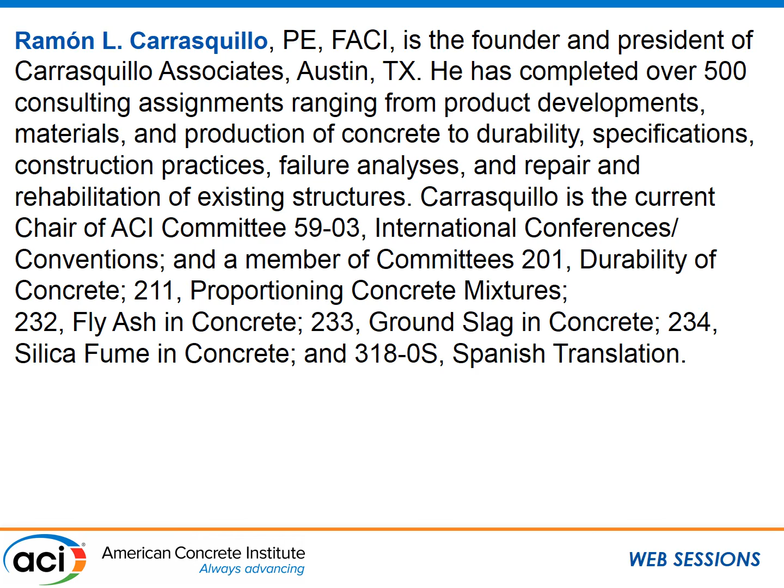First of all, I'd like to thank you for being here. Hopefully you're not going to be disappointed by the other guy's talk - mine may be, so hang around for everything. But what I'd like to do is talk a little bit about what the owner can expect to get from a 100-year service life specification.

Nowadays everybody wants a 100-year service life, and it reminds me of when I used to have a ready-mix concrete company. We cast a slab and it had a huge crack down the middle, and the architect was upset and asked, can you guarantee me that crack? I said, yeah, I guarantee we'll be there for the rest of your life. Anyway, it's the kind of thing where you can almost say anything, and you don't know exactly what you're saying.

But before we go much further, I'd like to ask you - do you know how fast the world is changing? That's something we don't tend to realize nowadays.

Let's talk about what it takes to have a service life. Basically, a service life is the result of the work of all parties involved. In other words, everybody has to be aligned and everybody has to do it correctly for you to get the service life you thought you were going to get. Unless everybody is lined up and contributing, it is not going to happen - and that's when things start becoming a problem.

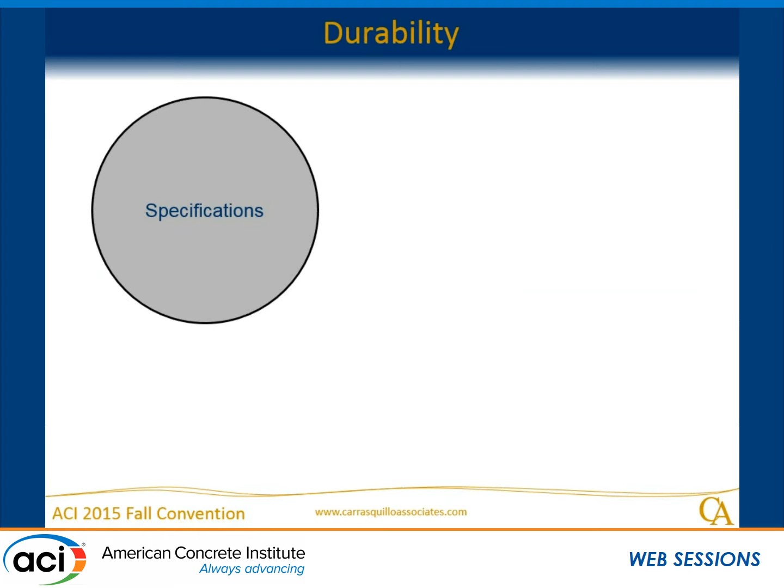Let's take durability as a simple example. Going into durability, you're going to have specifications, design, and construction. The question is: can the construction give you durability? Can the design give you durability? Can the specifications give you durability? None of them can give you durability by themselves. What happens is that where the three of them cross is where you're going to have durability - a small portion of all the efforts of everybody else.

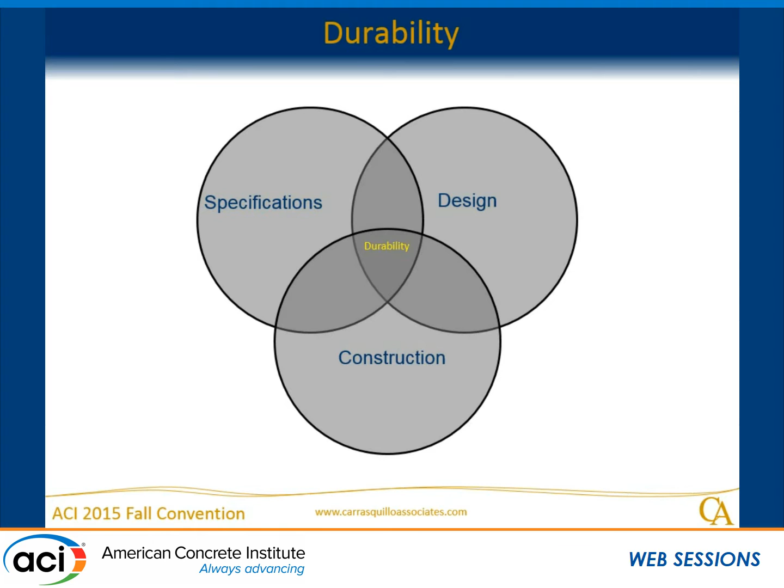So when you think about durability and service life, you have to start thinking that in my 100% world, there's only going to be about 20% of it that I'm going to share with other people, and that's where durability is going to be. That's where we're really going to work together and accomplish something.

My question to you is: durability, service life - if I have something that is durable, does that mean I have a long service life? Not necessarily. We focus on durability, we focus on making this durable, but that doesn't mean I'm going to have service life. So we have to understand the difference between service life and durability.

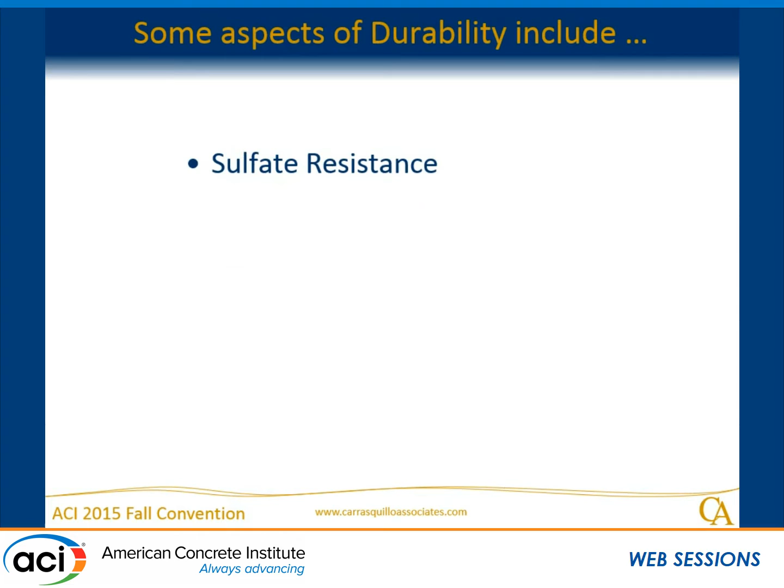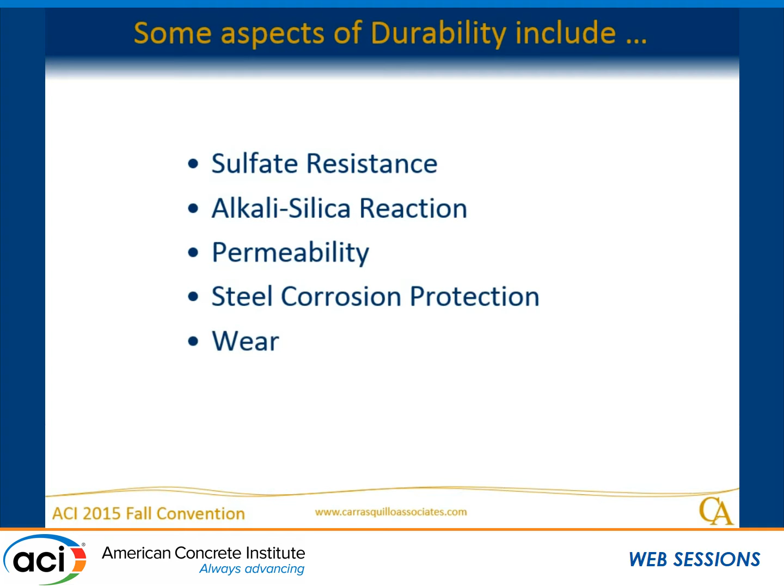Let's think of some aspects of durability: sulfate resistance, alkali-silica reaction, permeability, steel corrosion protection. Those are just a few aspects of durability. Now let's think about what are a few things that affect these.

On one side we have the cementitious material chemistry - Portland cement, pozzolans. If you go to different countries, you may have cements where, under standards like 1157, if it gets hard it's called cement. In some places you have 10% addition, some 30%, some 35%. So the world is getting very complicated.

Then you have the mix proportions - the water-cementitious material ratio, the cementitious content. You have the aggregates and aggregate characteristics. You have permeability, which is affected by pozzolans, by water-cementitious ratio, by consolidation. And then you have construction, which includes consolidation, curing, cracking, finishing, and jointing. So let's look at one of these - let's look at sulfate resistance.

Well, the sulfate resistance is affected by the cementitious chemistry, the proportions, the permeability, and the construction. And in ACI, we try to come up with one or two numbers, right? That'll give me durability.

Then let's look at the alkali-silica reaction. We have chemistry of the cement, we have proportions, we have aggregate characteristics, we have construction. Let's look at permeability. It's affected by the chemistry of the cementitious material, by the proportions, by the construction, the curing.

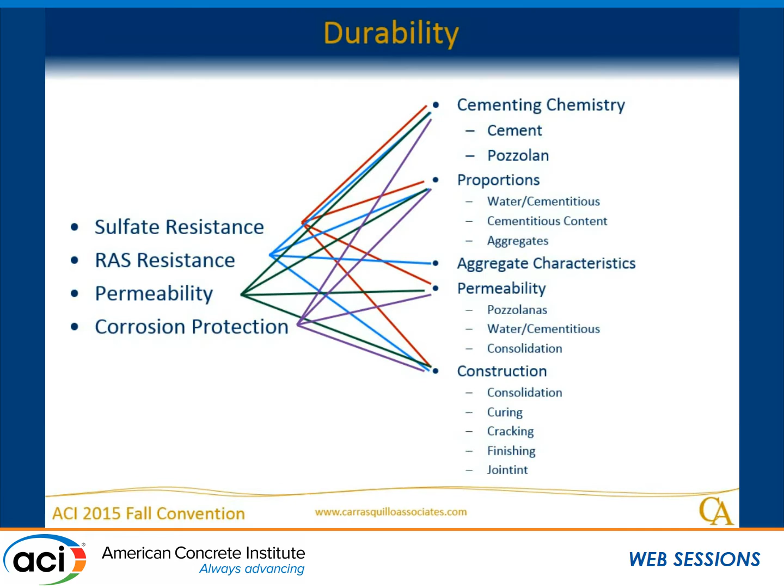Let's look at corrosion protection. It's affected by the chemistry, by the proportions, by the permeability, by the construction. So it's a mess. So anybody that thinks that durability is something very simple, it is not. It's something that really takes the effort of all the parties to make it work, and you have to really get concentrated on how all these materials even start working one with each other. And that even affects it further. So we're talking something that is very complicated.

But 100-year service life means what? It costs a lot, we'll get into that. Does it mean that the structure has to have a service life of 100 years? Or does it mean that a member, the beams, have to have a 100-year service life? Or does it mean that the materials have to have a 100-year service life? Does it mean that the concrete is durable, but I don't take care of the structure for it to give me the service life? I mean, what does it really mean? It's something extremely complicated.

So, for example, service life means that the structure, the members, the material can still perform 100 years from now what they do today. And I don't think I can blow the candle when I turn 95, you know what I'm saying? What does it mean? What does service life mean? Does it mean that 100 years from today I can still do what I'm doing today? Because that's a very sorry picture, don't you think?

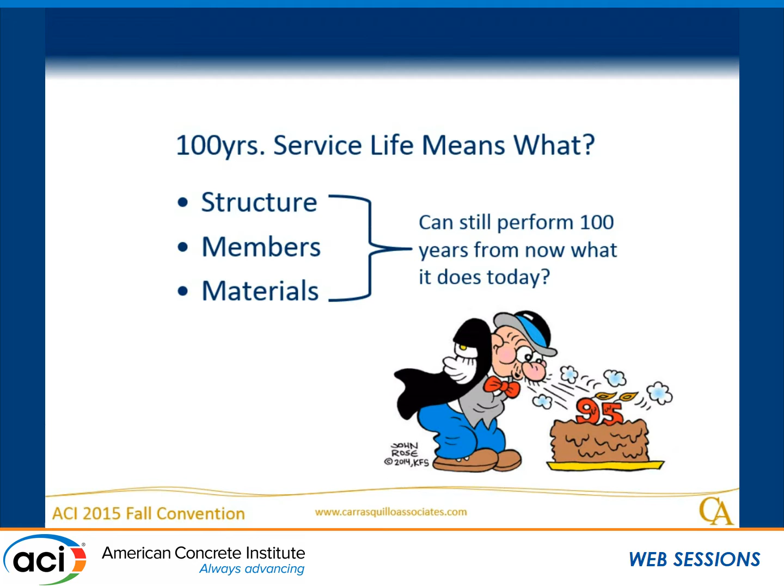If I'm designing something today and I give you 100-year service life to do the same thing, I can think of structures where that may be true - the Panama Canal, big dams and all that. But that's only a handful of structure types that we can expect to do the same thing. What are we talking about when we specify 100-year service life? By the way, I'll guarantee anything over 10 years - I'm not planning on being around, I'll be retired, but they'll have to look for me somewhere else, you know what I mean? But anyway, what are we talking about when we specify 100-year service life?

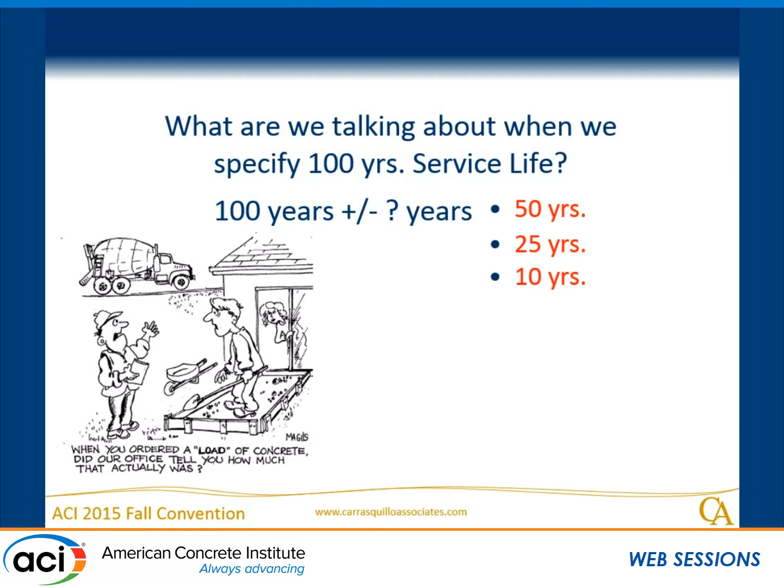Are we talking 100 years plus or minus what? You know, as the saying goes, when you ordered a load of concrete, did your office tell you how much that actually was? Are we talking plus or minus 50 years? Are we talking plus or minus 25? Are we talking plus or minus 10? Because I don't know any of those. Let's just be realistic - I mean, what do we mean by that?

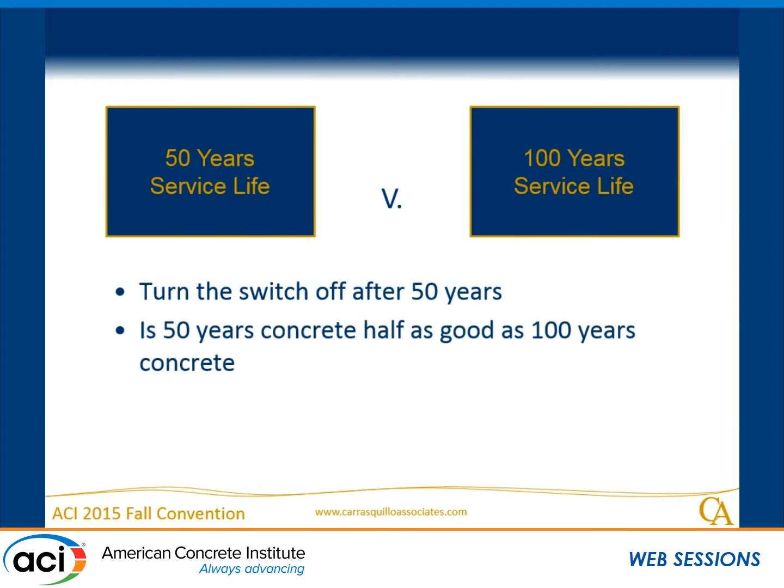So, for example, let me ask you a question here. You have a 50-year service life, and I have a 100-year service life, right? My question to you is, can I turn off the switch after 50 years? I mean, I'm going to give you a structure that lasts 50 but doesn't last 75 - how do I do that? Is 50-year concrete half as good as 100-year concrete? It should be, right? Because if we say there's a difference between 50-year service life and 100, there must be a difference between those two.

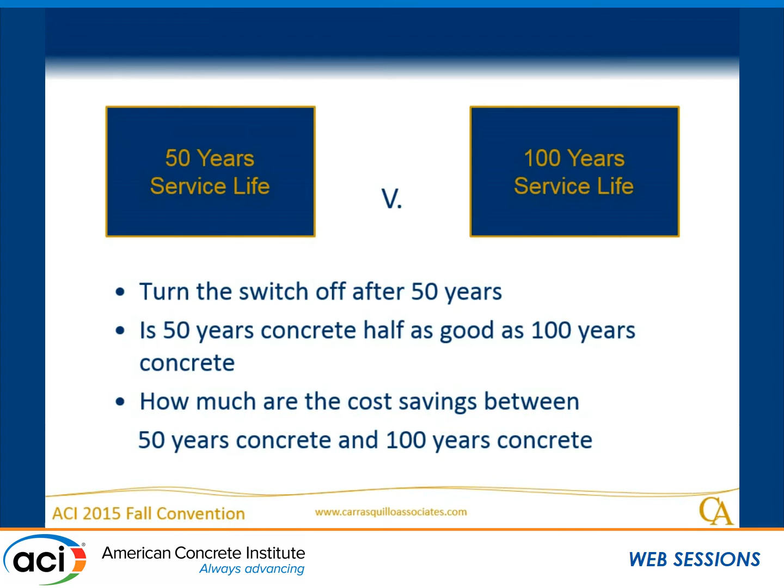I was hired one time by people in another country because they were going to do the highway system, and they wanted me to develop the specification for 100-year concrete. And I go there to the highway guy and I said, but can you tell me what the exposure conditions are? They say, any. I mean, what's that, any?

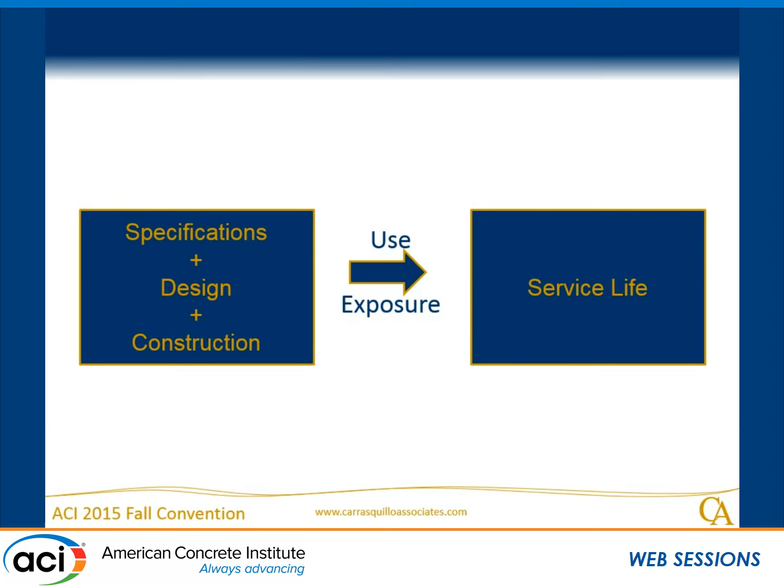People don't like to take responsibility over things. And then add the role of maintenance in ensuring the service life of a structure. A 100-year service life doesn't mean that you're not going to give it maintenance. And if you don't give it maintenance, you're stuck.

So a 100-year service life means that a few bars are not going to corrode here and there, that I'm going to do a little bit of patching, or that I'm going to get cracks and I'm not going to have to seal a few cracks. Is that what 100-year service life means?

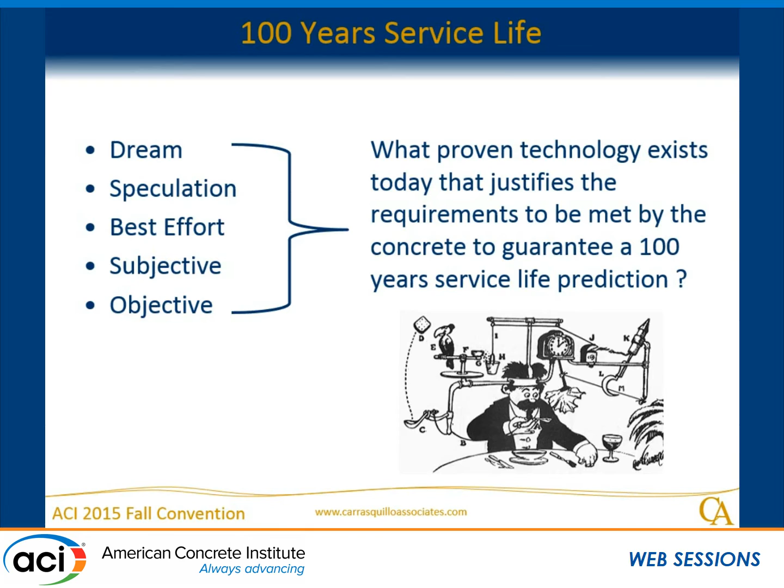So let me give you an example that happens in front of all of us. It happens in front of all of us, and we do it every day, and we blow the requirements of durability, and we sign off on it. Let's get an example. Let's talk about performance specs.

So for a performance spec, somebody has to determine what is needed, right? Somebody has to say, well, this structure needs this. And then they have to say, if I need that, then they have to determine what I have to specify based on what I think I need.

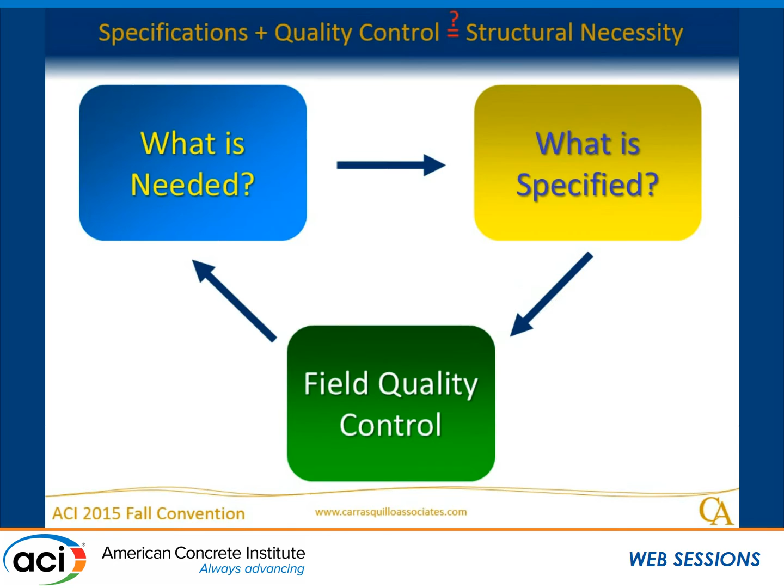Then I'm going to have a field quality control program, because when I build it, I have to do quality control so that whenever construction goes, I'm getting what I need - true or false, I need that, right? That's a basic concept. Let's say that we need strength and durability.

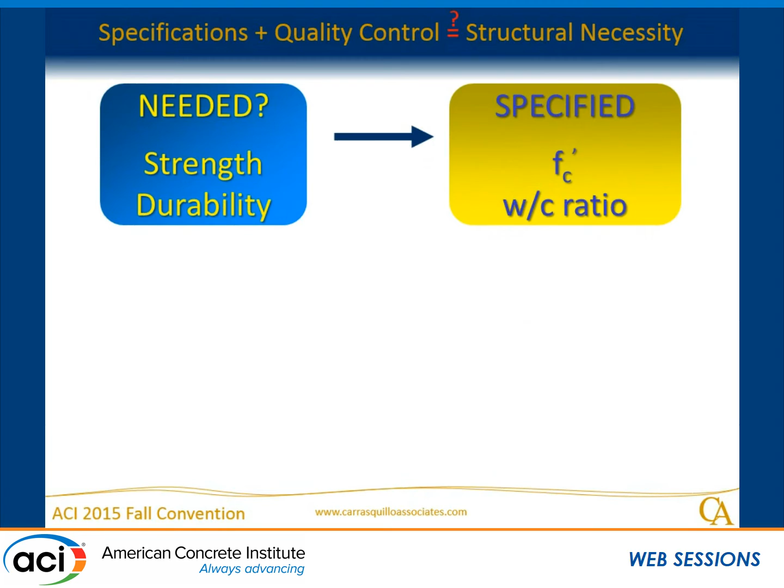And let's talk about typical specs. Let's say that we need strength and durability, so we specify a concrete strength and a water cement ratio, right? That's typical. And then I have a quality control program where I'm going to do strength - cylinder strength, I'm doing slump and air and all that kind of stuff.

But let's say all of those things meet, and I specify my quality control, I'm going to check strength, because you're the structural engineer, and they're going to send you the breaks. And when they send you the breaks, what are you going to do? If I'm asking for 5,000 and I get 5,001, it's okay. That's all you're going to do as a structural engineer.

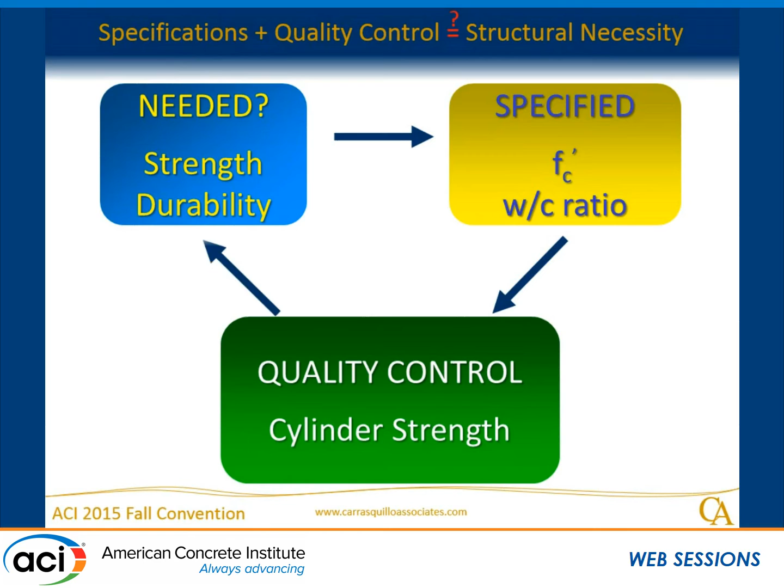And you're the one that determined what was needed, you wrote the specs, and now they're going to send you the results, and you're going to say, yeah, that's what I need. So the thing is good.

Let's get an example. I need strength and durability, so I specify 3,000 PSI and a water cement ratio of 0.45, because I have all of the ACI committee reports and all that, and I know that I need a 0.45 water cement ratio. So I come in.

Now what happens is the contractor gets a submittal from the ready-mix company, and then they send me the results, right? So because the specs call for a water cement ratio of 0.45 and the specs need 3,000, what will happen is that the submittal at a water cement ratio of 0.45 is going to break on average much above 3,000, maybe 5,800. That's the nature of the beast.

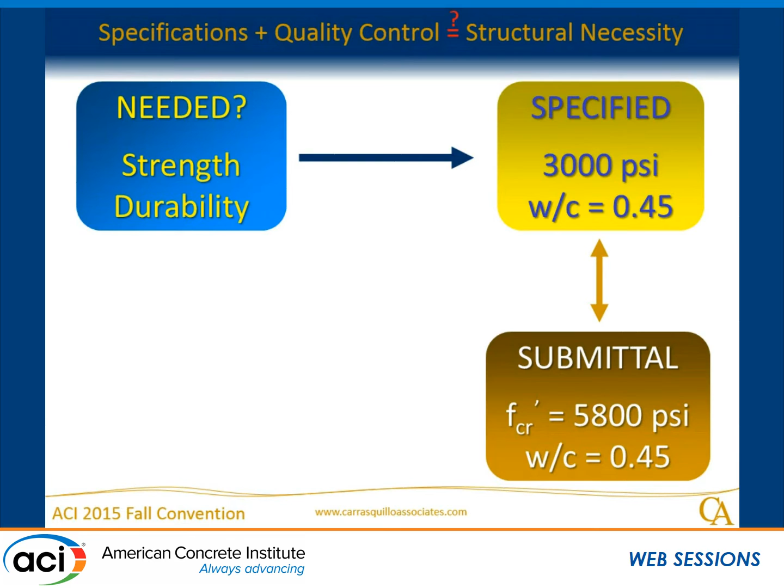That's always going to happen. Whenever we go with this 0.45 water cement ratio, the strengths are going to be way above what structurally we need, right? I get a submittal, and you're the structural engineer, and they send you the submittal, and you don't know anything about what's in it when it comes in, and you don't even know what the admixtures are, but all you know is that somebody said water cement ratio 0.45, and hey, in school they taught me, my mother taught me, that 5,800 was more than 3,000, so that's okay.

Anybody, including my mother, knows that 3,300 is more than 3,000. But my question to you is this: does that concrete have a water cement ratio of 0.45, which is what I needed for durability? No. And we do it every day. Then afterwards we wonder why the concrete is corroding and the rebars are corroding, and we're getting all sorts of problems in the structure because of the engineer. That's why you have to sue the engineer. When this happens, we bring the engineer in and you feel sorry for him because he doesn't even know what's going on. But he signed off on everything. So his insurance is there, but he blew it. He's the one that wrote the spec.

He's the one that approved the submittal, and he's the one that approved the cylinder breaks. So now when I take a core and send them to David Rossi, he says, man, this has more water than Niagara Falls. Yeah, but it broke at 3,300, which is more than 3,000. And in all of that, the guy's guaranteeing a 100-year service life.

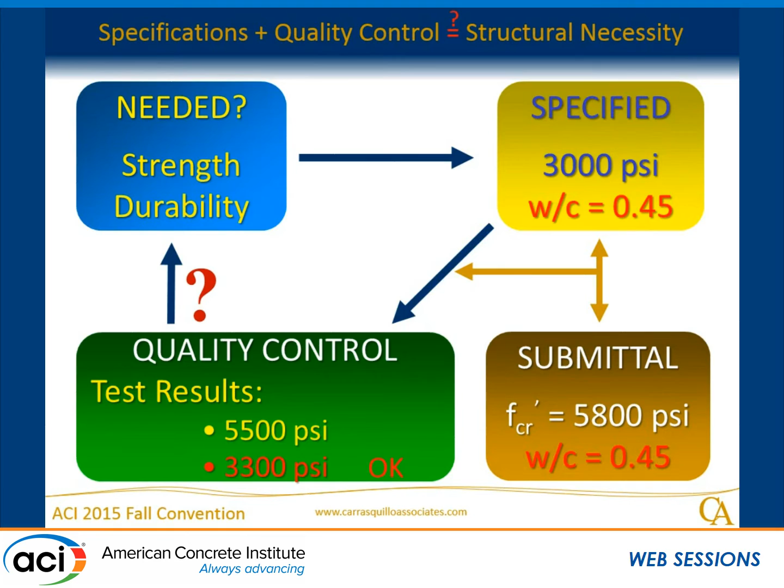We have to understand what's going on. We have to understand the world we're living in. So service life requires thinking outside of the box. And thinking outside of the box, we think of a job like this. This is a little bridge in Puerto Rico at a rice grain terminal. Hey, the corroded rebars are at least holding the little dinghy there.

But after, in Puerto Rico, we put everything to use. But I'll tell you one thing, what's the problem there? Yeah, that's right, you could have a lot of problems, right? That's why when you go to a job, the first thing you do is what? Say nothing. I mean, unless you can improve on silence, keep your mouth shut. You know what I'm saying? That's the number one rule.

But somebody would say, oh, the steel is corroding. Let me tell you one thing: the steel is supposed to corrode when the chloride ions get to it. Period. So the steel is doing what it's supposed to do. The question is, why is it that the chloride ions are getting to the steel? Is it the permeability of the concrete? Is it the cover of the concrete? Is it the sulfate resistance of the concrete that is causing degradation of the concrete cover, and therefore now the chlorides get there even though you have the right permeability?

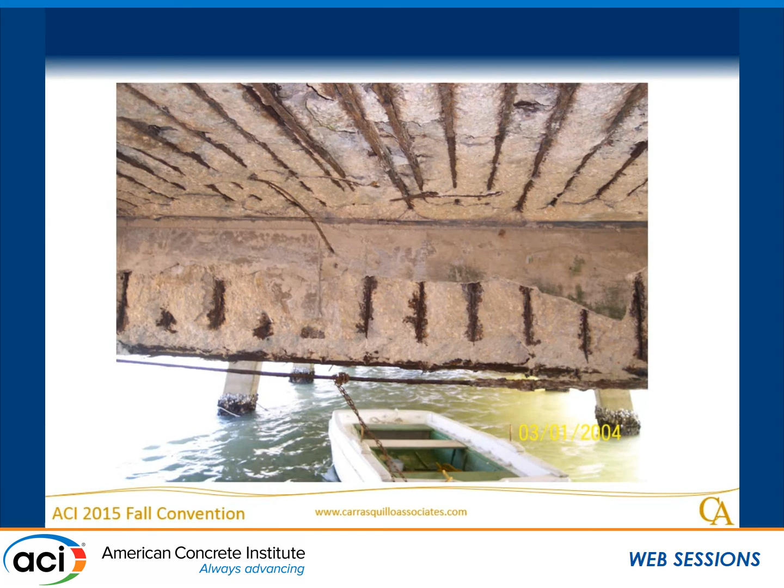You have many, many different things that could go wrong, so you have to think of all the possible aspects. And what's a big problem? The big problem is in construction, we use bad concrete to satisfy the specs. Have you ever seen that? You have a spec, and all of these concretes, this one, this one, this one, they all have the same water cement ratio, and they all have the same slump.

So they all meet the specs. However, it's not the same thing to date this guy as to date this guy or to date this guy, you know what I'm saying? But they all meet the specs. How can that be? What is the engineer's responsibility in constructability since they wrote the specs? We're forgetting that. And you know what happens in the industry, and this happens every day.

A contractor never has enough time to wait for the concrete to have, let's say, a low permeability. Because somebody comes back and says, I want the specs to have a C1202 resistance to chloride penetration of 1,500 coulombs at 28 days. And they say, but why at 28 days? Well, because the contractor cannot wait 6 months to find out if it meets 1,500 or not. So he says, I have to test it at 28 days. So for you to have concrete that passes that spec at 28 days, what do you have to do? Use bad concrete. You're going to use this guy, because this guy has silica fume and all that kind of stuff, so you use that guy so it passes the test at 28 days of C1202.

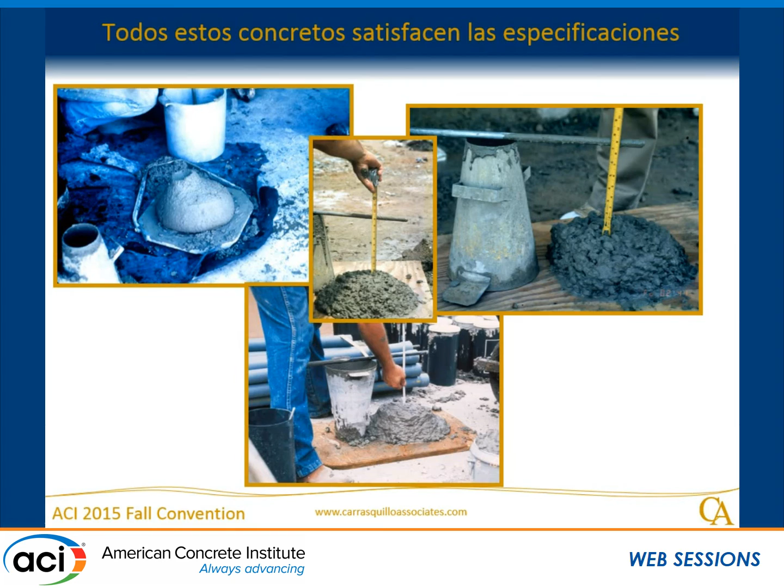So what happened was they said, how can we avoid that? And the first question you have to decide is: when is it important to determine at what age after placement the concrete must show that it meets the requirements in the specifications to ensure its durability and service life?

My question to you is, if you're building a bridge deck or a pier, do you need that permeability in the first 28 days? No, you need it in a year. I don't care if the chloride penetrates a quarter of an inch or an eighth of an inch, not even that much. But am I going to have a concrete that cracks just so I can meet it at 28 days?

So we said, hey guys, let's do the following. We're going to bring a ready-mix truck here. I had a few students, and I said each one of you is going to come up with any concoction you want between 0 and 28 days of accelerated curing, slow curing, whatever you want, for 28 days, and then we'll test the permeability at 28 days.

But in the meantime, we're going to have concrete cylinders that we put in water and keep them there for a year. And at the end of the year, we're going to find out who wins.

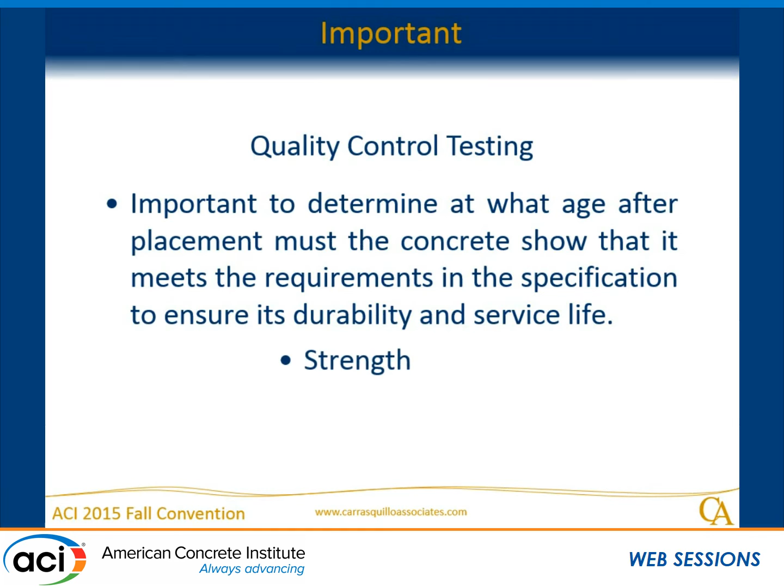And we did it with many different kinds of mixes: high cement content, low cement content, high stone, and all that. So the big question is, okay, I need strength, I need permeability. When do I put it in service?

So you have to always remember that not everything is correct. Like, you know, even Noah's Ark had a problem. The woodpecker had to go.

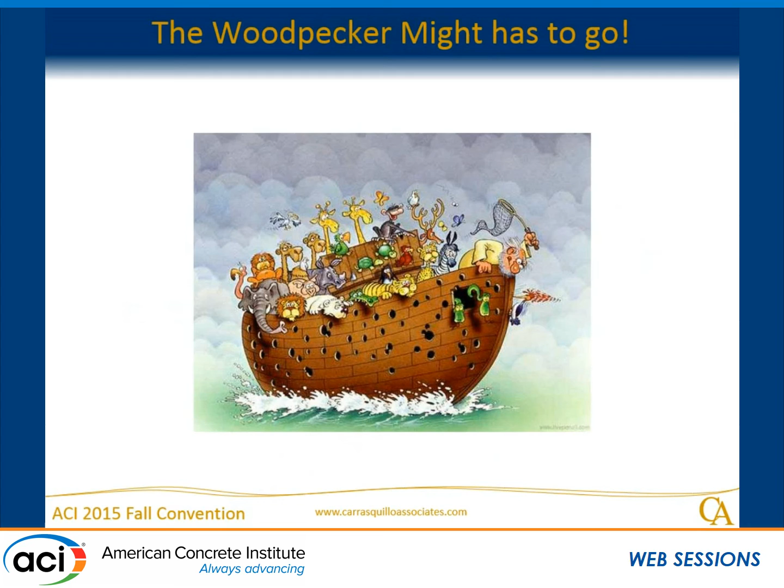But anyway, we developed a specification, and this specification doesn't have a water-cement ratio. It doesn't have a water-cement ratio because, as far as I'm concerned, who cares? What does the water-cement ratio tell me? I don't know what the water-cement ratio, or water-cementitious material ratio, tells me. It doesn't tell me anything.

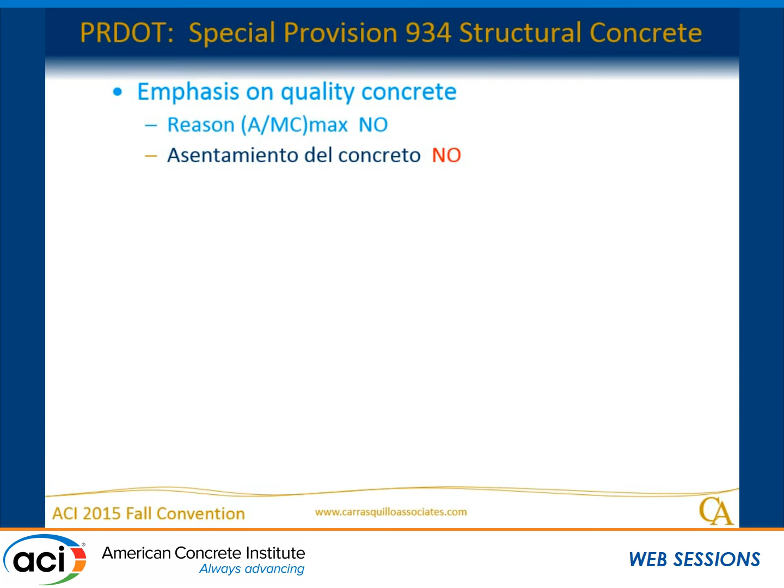It had no slump requirement. I apologize for the Spanish part. Why the heck do I care about the slump? Let the contractor get together with the concrete supplier, and if he's going to pump or do this or that, I want it to be well consolidated concrete. Let them decide on the slump.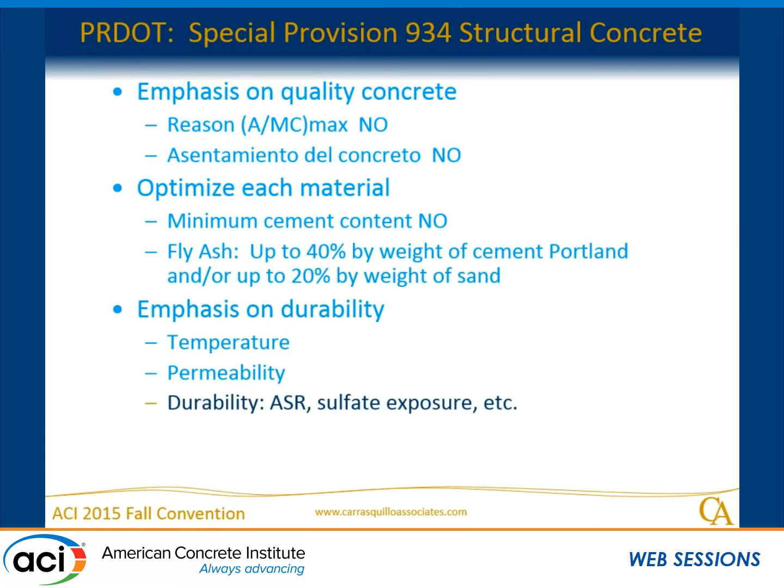Hey, whatever it takes, you know what I'm saying? Well, they already finished school, so we're not teaching them anything, okay? And we emphasize durability, temperature, permeability, reducing cracking, and curing.

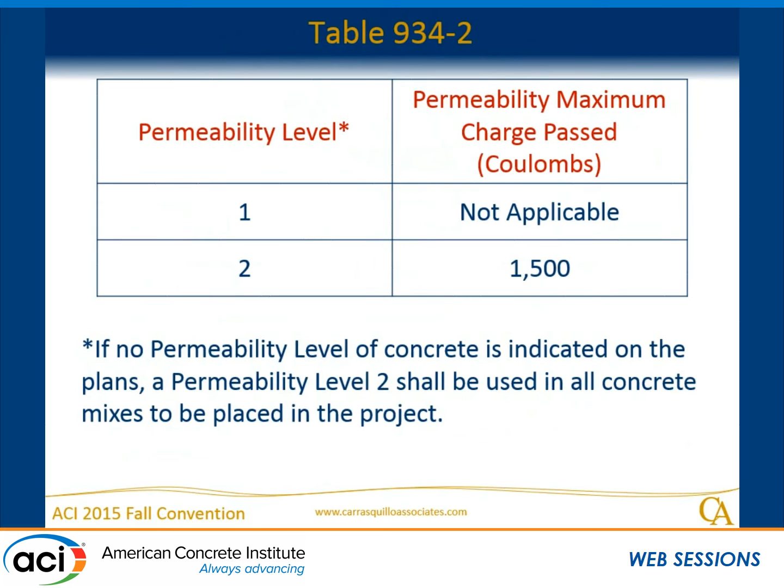So we have a spec that says, okay, you're going to have a requirement of 1,500 coulombs, but the way you're going to test it is at 28 days following an accelerated curing program. And this accelerated curing program consists of the following.

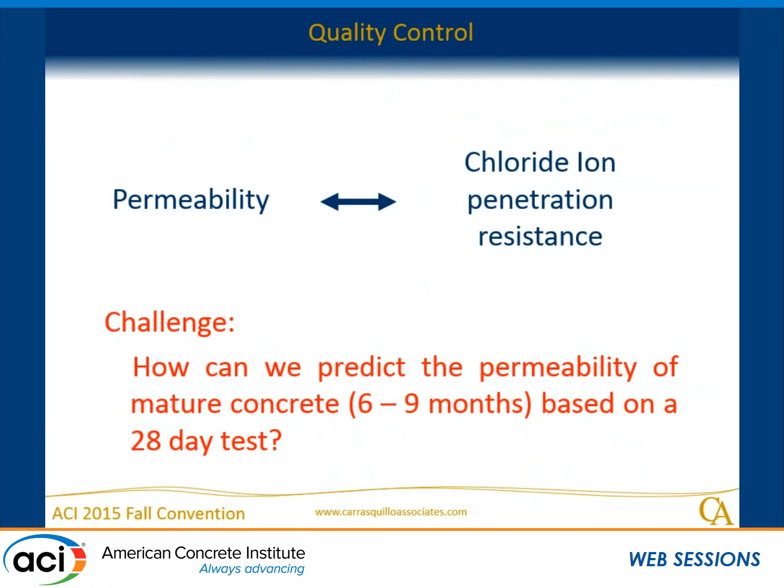How can we predict the permeability of mature concrete at 6 to 9 months based on a 28-day test? Well, very simple. I had all the students ask: can I do an accelerated test, testing at 28 days, that will give me the equivalent of moist curing?

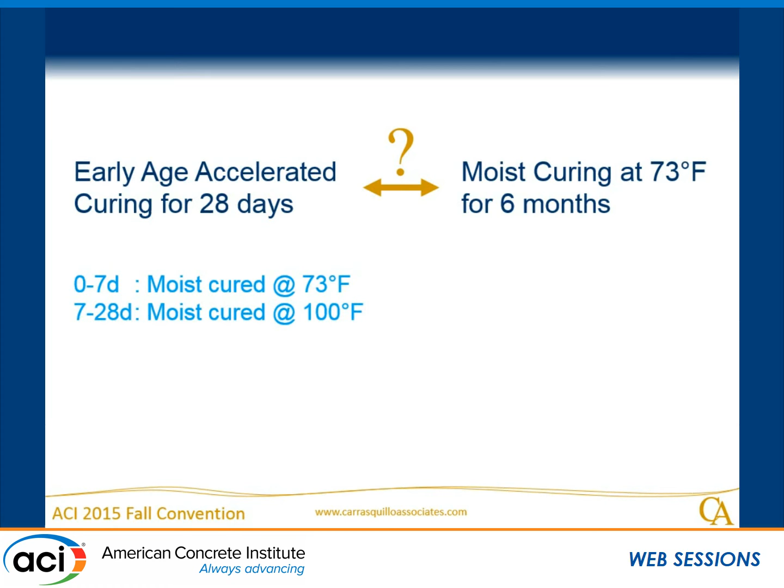So if I come in and moist cure the cylinders between 0 and 7 days at 73 degrees Fahrenheit, the regular moist curing procedure and all that—that's very important because you need good hydration on the concrete before you accelerate. Then you put it at 100 degrees Fahrenheit between 7 and 28 days, and you're going to match fairly close what's going to happen in about 6 to 9 months.

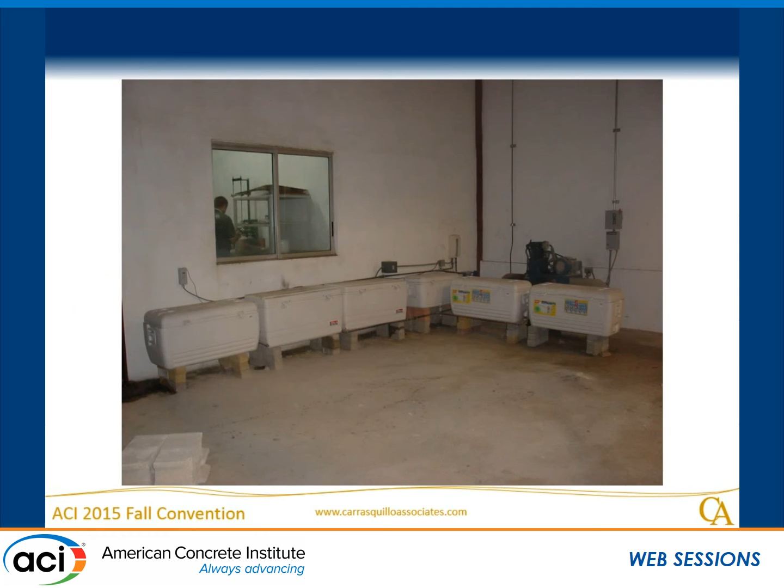And what we do is we have a system of coolers—this method is approved by the Federal Highway Administration, using bridges and all that kind of stuff. You put the cylinders there, and then let's look at an example.

I can have a mix without fly ash, with a water cement ratio of 0.55, that at 28-day moist cure gives me 7,000 coulombs. That's not good. But at 6 months, gives me 4,500. And if I accelerate cure, it gives me 5,500. For the same water cement ratio, I will have different performances.

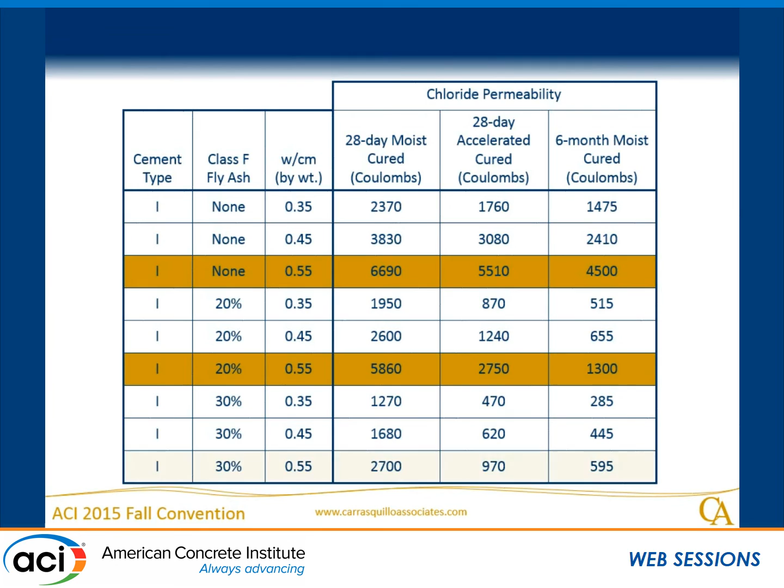So the end result is this: if this is a 28-day moist cure performance of a mix design, obviously I'm not meeting 1,500, right? But that's good concrete—that's concrete I like to use because it's good mud. Now, if I cure it for 6 months, I get these values. And now I have this one with 20% fly ash that gives me 1,500, and this one with 30% gives me less than 1,000. So now the question is: I want to use this good concrete, but I want to be able to show in 28 days that I can meet 1,500.

So this accelerated cure process will tend to match—it'll be somewhere in between those two. In this case, we will use 30% cement replacement because it met my 1,500 at 6 months. But now I don't have to put silica fume, and I have a good concrete mix—one that can be pumped, one that can be finished, one that has lower shrinkage and all that.

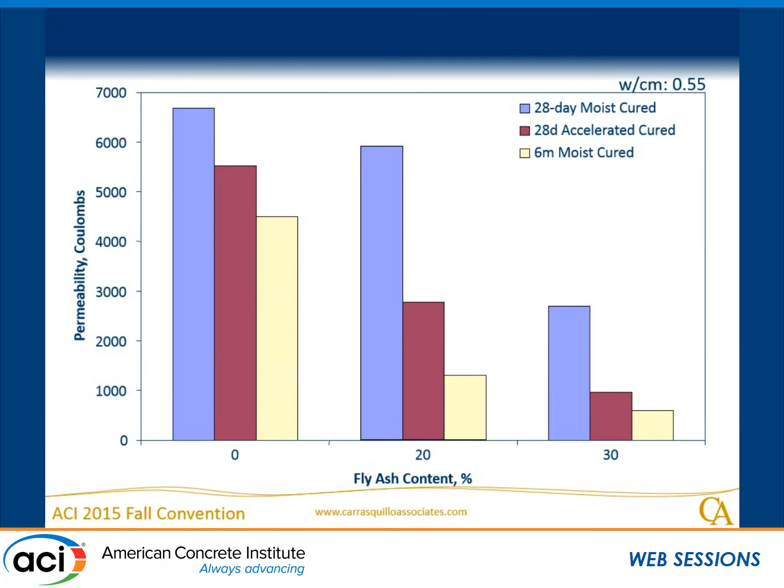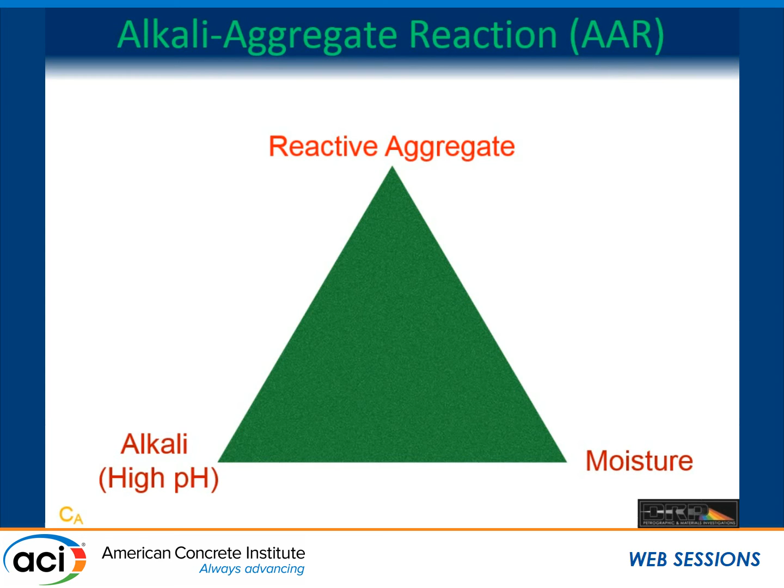But I have to decide when is it that I need the durability. Let's take alkali-silica reaction. Alkali-silica reaction needs reactive aggregate, alkalis, and moisture, right? And now I want 100-year service life. Well, let's say I want 50, because I don't want to pay too much.

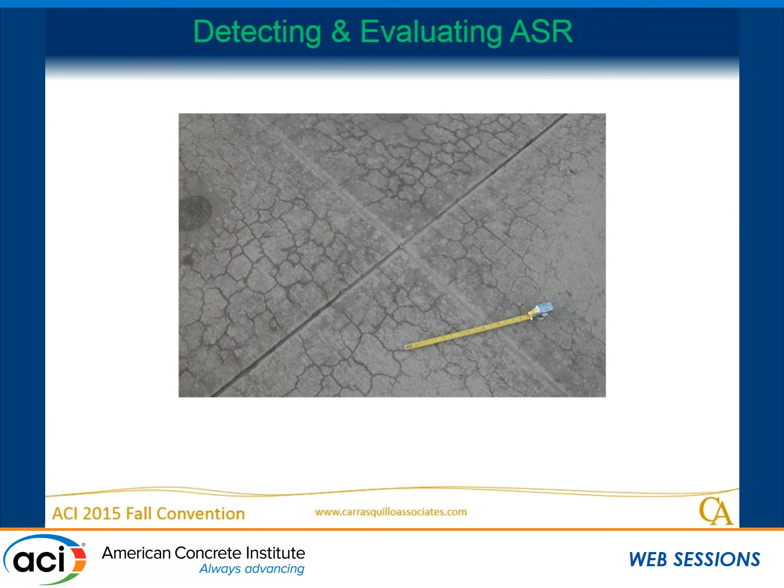So tell me—you get this concrete, which, my understanding is from David, is the airport we landed in. How am I going to say that that thing is going to have 100-year service life, 50, 10? How are you going to do that? Well, you may stay like this forever, or you may get to hell next month. And then on top of that, you get a freeze-thaw, and it gets compounded and all that. So how will I handle that?

Tell me which one of these tests tells me that I can do 100 years and not 50, or that I can do 50 and not 75. In some aspects of durability of concrete, it's either durable or not durable. I can't have a switch with a dial from 1 to 10—it's either on or off, either works or it doesn't work.

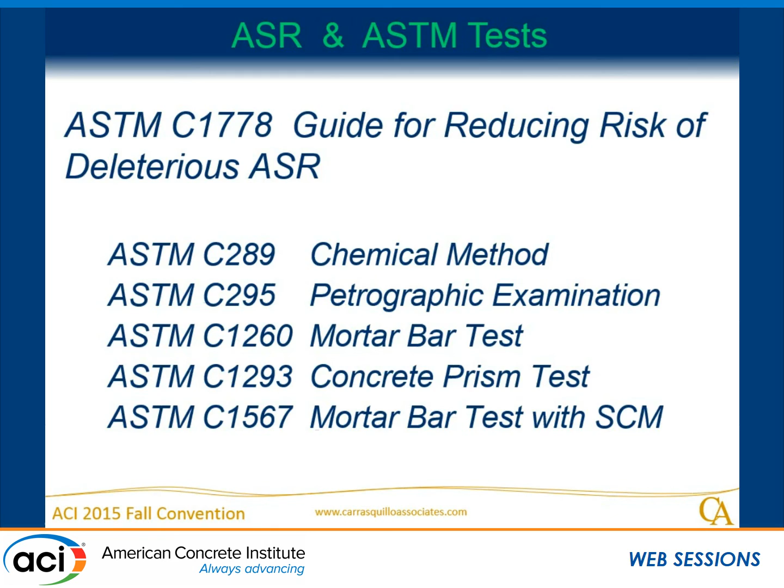For example, you get a material which is mostly reactive—98% of the material is reactive. So how many years is it going to last? Then you have the ASTM C1260, right, where we do a quick test.

And my question to you is: right here it's not predictable. It says that it's going to react, but does that mean it's going to last 10 years, or does that mean it's going to last 100 years? And if it is in a kind of drier environment, will it last 100 years? But if it's wetter, how do you know that?

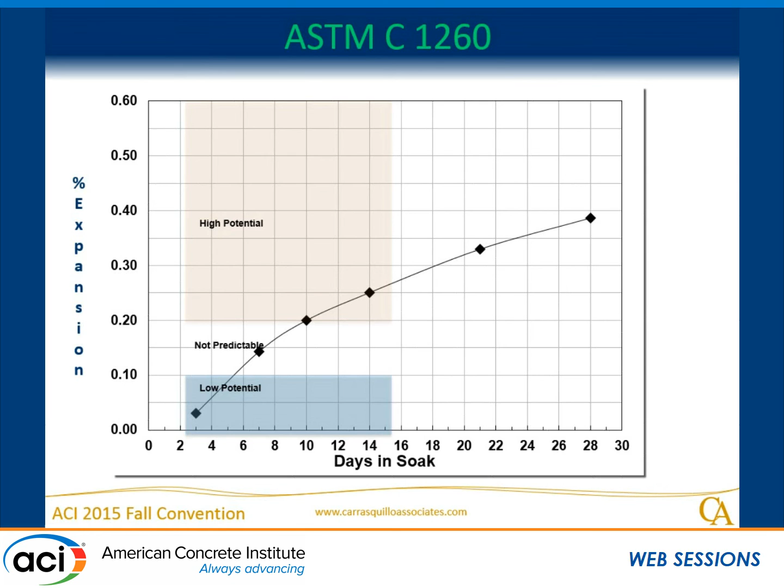I don't know—there's no technology in the ASTM, there's no testing to tell me what to do or what I can do. Or you come here and send a core to David Rothstein, and he comes back and tells you, 'Wow, I got a very beautiful crack full of gel.' I said, now so what? What does that mean? Does that mean that concrete is not going to last? Because the performance of the concrete is not necessarily directly related to what I see inside the concrete—it takes more reactions before it can affect the performance of the concrete.

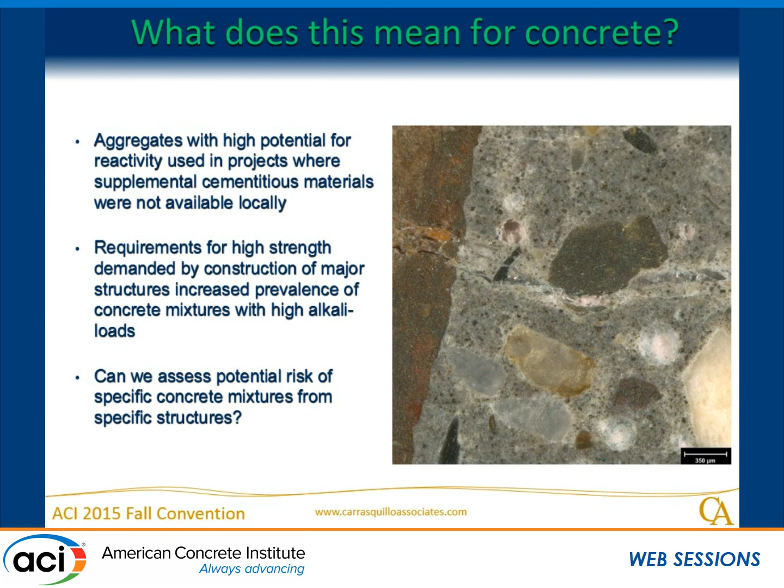So all of this is involved in the durability of concrete. And then we got the latest version of ASR—we call it the warts.

We have been getting this for about 10 years in Texas—we get all these warts coming in the concrete. It's pretty nice, very nice. The whole thing started one time when a lady came in on a rainy day. She pulled up into her garage, and when she got out, she slipped and fell down.

The gel got very slippery because the car was dripping water and all that. We started looking, and we had done about 3 or 4 jobs like this, warts. We've got one right now that's pretty nice.

What does that mean? There's no cracking. This doesn't cause any cracking in the concrete. No cracking at all. So what do you do?

You know why this happened in one case we're looking at? The engineer wrote that you're going to put a polyethylene covering the whole foundation, right? And then the contractor comes back and says that engineer is damn stupid. How am I going to get all this plastic and shove it down the beams, the grade beams? You know what I mean? To be able to get good support.

So he asked the engineer, why don't I lay it flat and take a pocket knife and cut it down the middle in the grade beams and then flap it down, because that's a thick part of the slab, there's not going to be any problem with moisture coming through.

Well, guess what? You start looking at that and all the grade beams is where the warts are happening, because the water comes in on the sides, and then it gets to the top and you get it there.

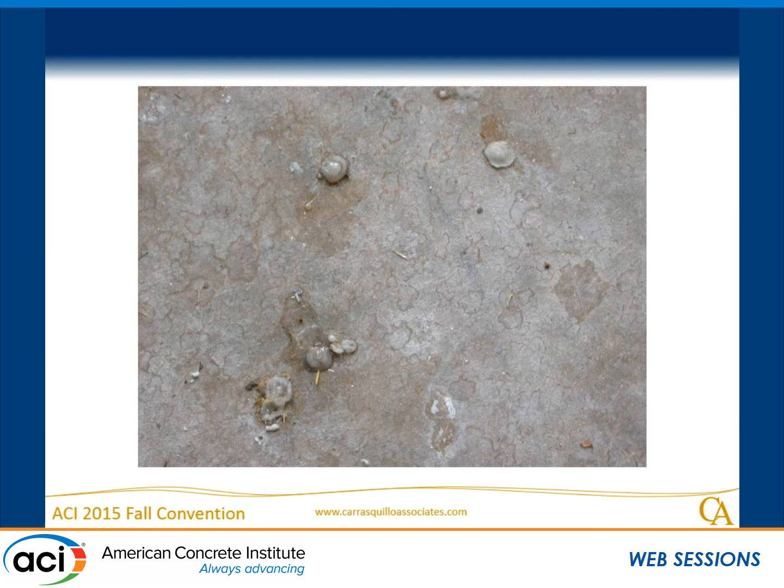So whose fault is it? When you send the core to David, he'll look at the famous chert particles and see, look at how pretty, that's the gel and the gel is going out through there, and the lady fell down.

How do you put years on that? And who's causing that? What's causing this? Some people say that whenever you give the concrete a hard trowel finish, you increase the alkali content on the top surface, so those reactive particles are more reactive close to the surface than further down inside. I don't know. We don't know.

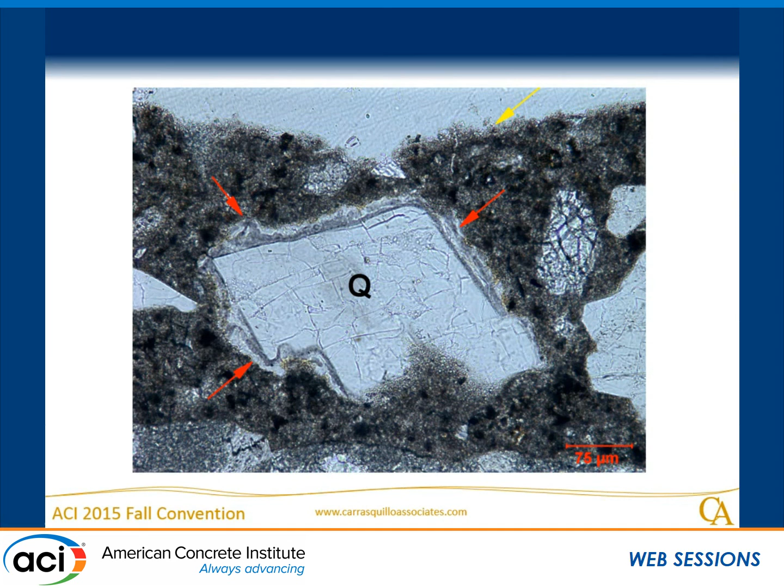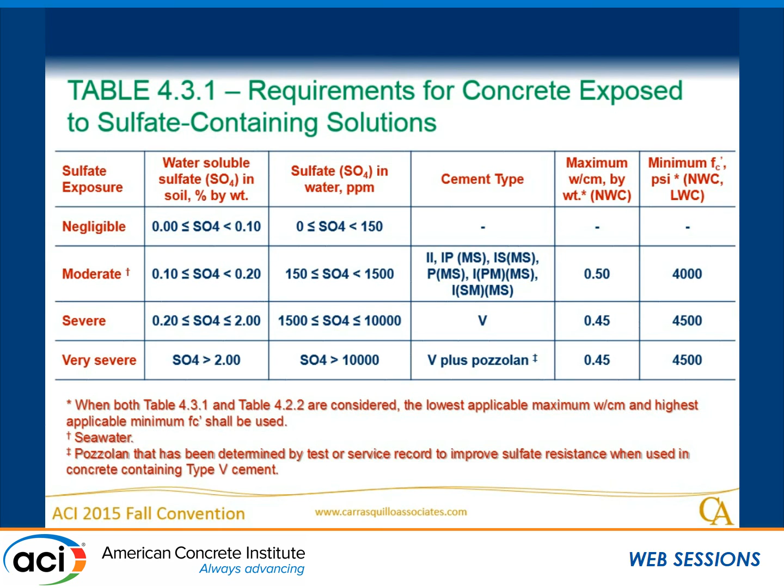It doesn't exist anymore. So the question is, when we say 100-year service life, now let's add another component: cracking. Let's do it, because we design structures assuming what? That it's going to crack. Okay?

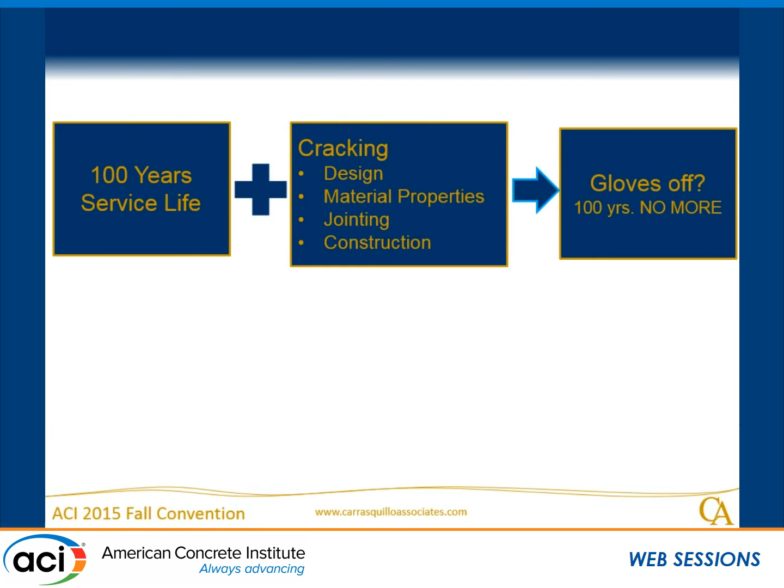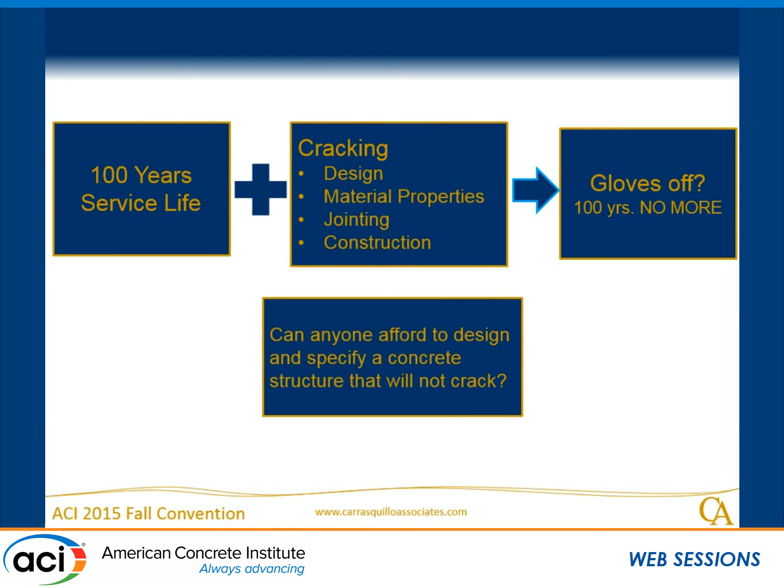So the moment it cracks, what happens? Gloves off. And not only that, ACI says you're going to design it so it cracks. My question to you: can anyone afford to design and specify a concrete structure that will not crack? It's almost like we're playing with the same thing, and we don't even want to recognize what we're saying. So, okay, now what?

In conclusion, we started by asking the question: what can the owner expect to get from a 100-year service life specification? And my question is, do you get a 100-year service life? In my opinion, what you get is the best effort of all parties to achieve the most service life given today's technology, codes, construction practices, predictions, and maintenance, and budget.

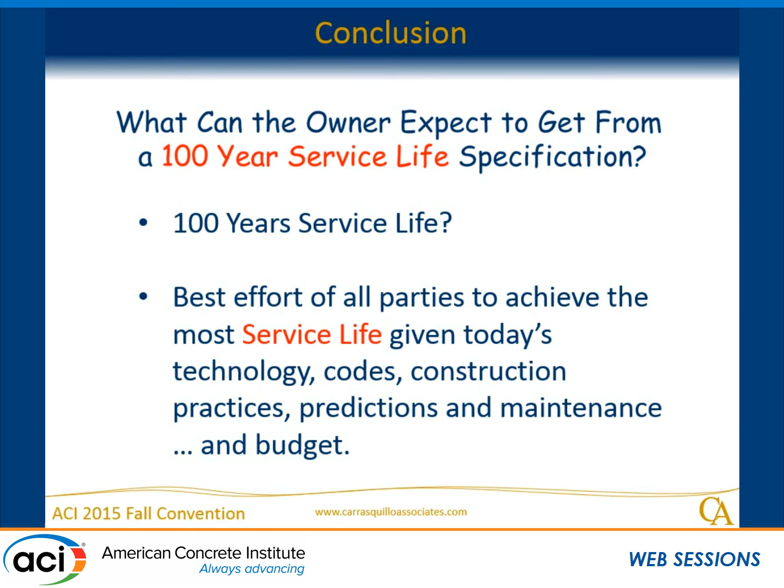That's what you do. You say, I want a 100-year service life, I'm going to throw a book at it. I'm going to do the best I can with the design and the budget and everything, and I'm going to allow a few cracks here, a few cracks there. I'm going to put a maintenance program where we're going to seal cracks and do all that kind of stuff. And then we're going to do the best we can. That's all we can do.

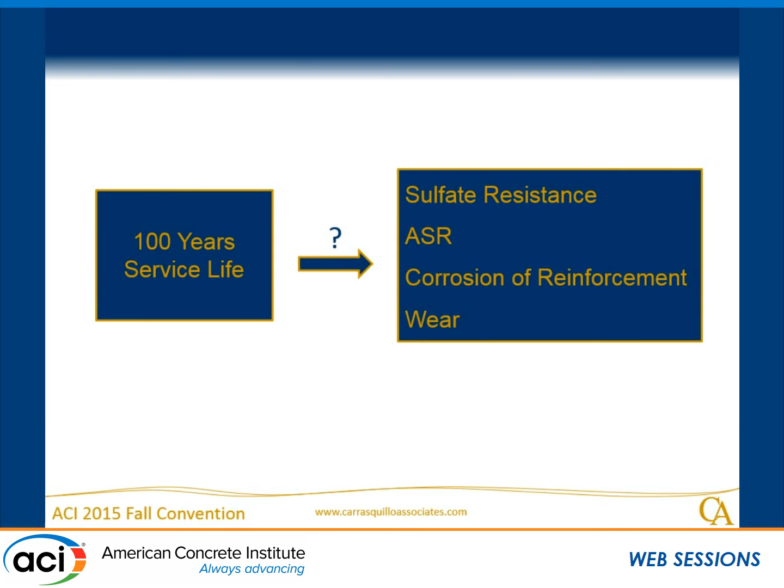So 100-year service life, do we mean 100-year service life for sulfate resistance, alkali-silica reaction, corrosion of reinforcement? What do we mean? I have never seen a spec that says 100-year service life and tells you what damage occurs in 100 years. All these aspects of durability have more or less possibility for control because it's easier to control the properties of the product that go into it. But in terms of the overall structure, service life is a different game.

So I started by asking you, how fast is the world changing? Don't worry, it's already there.